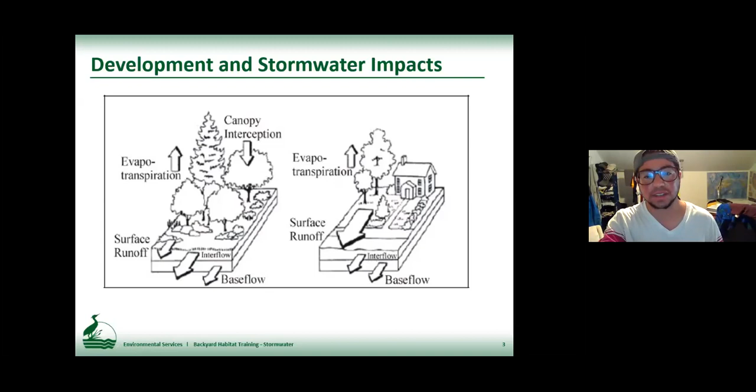Oh wait, hold on. Let me go back. So again, I work for the city of Portland. So I just wanted to talk a little bit about what the stormwater system looks like in Portland and kind of why. And then once I talk about this, you'll understand a little bit more of the effects that runoff can have. So if we're starting here in the middle of the city, we have a combined sewer system.

This means that the stormwater and the sewage is piped underground to the same pipes and then piped to the treatment plant and treated. So here in this portion of the city, the stormwater system is piped underground and mixes with sewage. Then once you get into these outer areas like North Portland and East Portland, this is where the storm and the sewer are actually separated. So they're still piped, but instead of the stormwater being piped with the sewage to the treatment plant, the stormwater is piped separately to things called sumps or dry wells, which are basically like the reverse of a regular well. So oftentimes there's these big, huge concrete cylinders below ground that have holes in them.

The water is piped to these stormwater facilities and then given the chance to soak, to infiltrate through the holes in the concrete cylinder into the surrounding medium, into the surrounding soil, and then eventually over time can then soak down and recharge the groundwater in those areas.

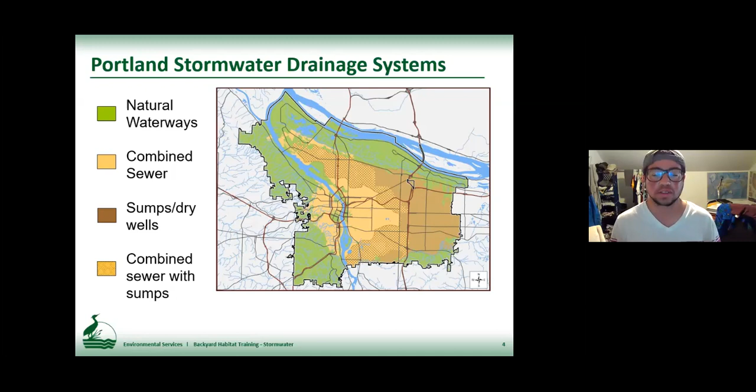So why do we have to worry about runoff? What's the big deal about runoff? It's just water. But no, it can have huge impacts. And I wanted to talk a little bit before about the types of systems so that we can think more about how the runoff can affect those systems.

So a big one is just the physical impacts of having a ton of water moving at a really quick speed. I'm sure everyone has experienced this where it doesn't seem like it's raining really even that hard, but you can see a little stream starting to develop on your street along the curb. And that's because stormwater can really accumulate and it can accumulate fast.

And when you have water running through the same pathways, it causes erosion, which can then cause pipes to be exposed, has a negative effect on habitat, and including, you can see in this picture, some sedimentation getting into the waterways, which also negatively affects habitat.

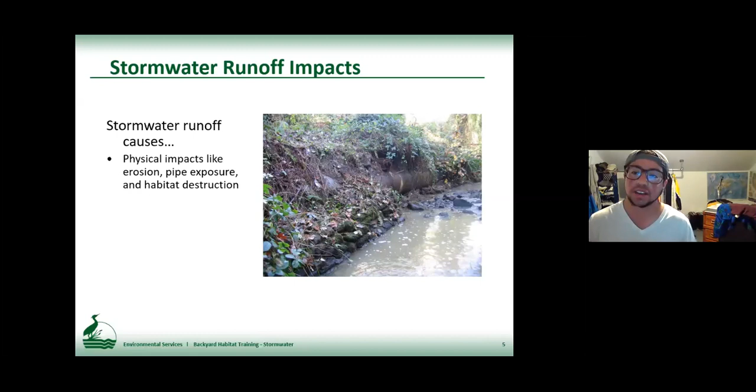Second way, I talked about those sumps, so the stormwater going to these underground parts of the city, and as stormwater makes its way down the street, it's not only picking up other water and picking up speed, but it's also picking up pollutants from cars, from all the things that we humans do. And specifically in those sumped areas, that's where those pollutants are put underground and then allowed to soak into the groundwater.

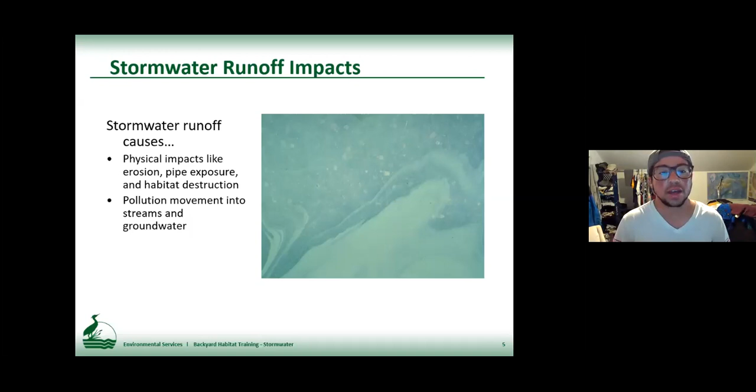Or if we're in one of those natural areas where the stormwater is handled naturally, then that pollutant just goes straight to streams. It doesn't even really have a chance to be treated by the treatment plant. And the more that runs off with our stormwater, the more debris, the more pollutants, it just puts a bigger strain on our system, even the piped system.

So again, I'm sure everyone has experienced this where you have an inlet on your street that's just chock full of leaves and debris and isn't able to actually let that stormwater down into the pipes. When that happens, those have to be maintained by folks on the ground. Someone has to come out there and physically suck all that stuff out of the inlet to even allow the stormwater to get there.

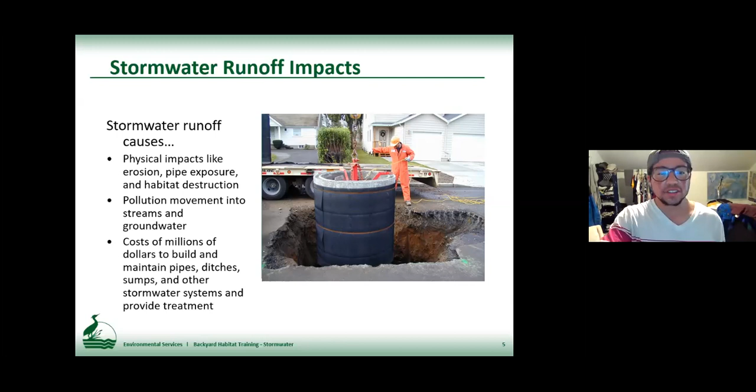So it's just a higher burden on the system itself, a higher burden on the maintenance, and even on the treatment plant, all of those pollutants going to the treatment plant, then the treatment plant has to deal with that. So let's do some retrofits instead.

Using retrofits as part of the solution mimics the natural hydrologic cycle in a manner that is safe and effective for the site and the neighboring properties. So it's doing what nature used to do before we paved it over with streets and sidewalks. So the four main components to any stormwater management project. First is collect and convey. For a roof, that would be collecting with the gutters.

If it's a paved area, collecting with curbs, and then moving it to the area of the property where it can have a chance to slow down. So that's the second part, slowing down and detaining, giving it time and space to sit in one spot. Then the third component, it has the time to infiltrate or evaporate or be used by the plants around it.

And then the fourth component, this is something that I think about a lot in my work: no matter how robust the design is for the stormwater facility, you always want to have some sort of safe overflow or escape route in case the stormwater facility, say it's a rain garden, does fill up and doesn't soak into the ground fast enough. It has a way to overflow away from the house, because you don't want it to back up into the house or other assets that can be damaged by water.

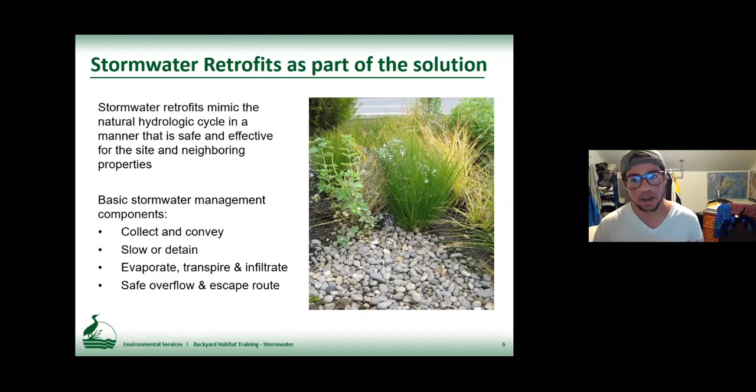Yeah, so the benefits of a stormwater retrofit: the simplest solution, it's right there. This diagram is kind of silly, but that's exactly how I think about it. The stormwater is already there, so might as well just manage it where it's at, where it falls.

Community engagement, especially in the work that I do, people retrofitting stormwater. When they learn about the stormwater system and understand their role and how they can actually help, then they get really pumped about it. They tell their neighbors, and then pretty soon the whole street has rain gardens, and people like to know that they are having a positive influence on their community.

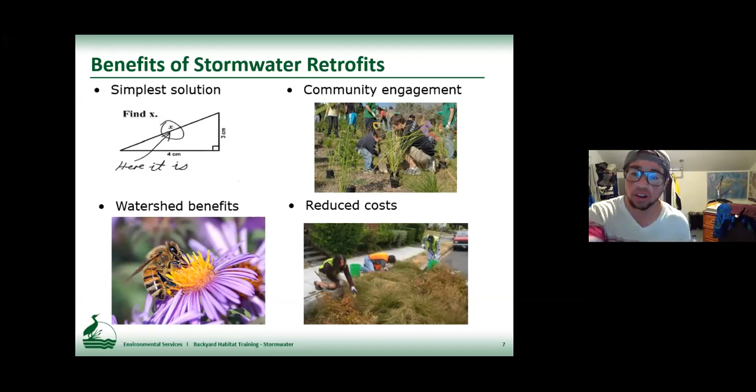And then the watershed benefits, obviously, keeping the water where it has historically been, being able to recharge the groundwater, adding native plants, and all of that great stuff that comes with adding green space to a city. And then again, reduced costs. I talked a little bit about this before, but just taking that burden off of our piped public system, less maintenance, and less cost for all of us, because we all participate through taxes.

Okay, so that was just an overview of stormwater and why it's such an important issue. Now I'm going to go into the individual stormwater menu options that participants can choose to get the stormwater credit, and I'm just going to go through all of these. Originally, I was going to say we could take questions for each one, but I think maybe we should just save all the questions for the end.

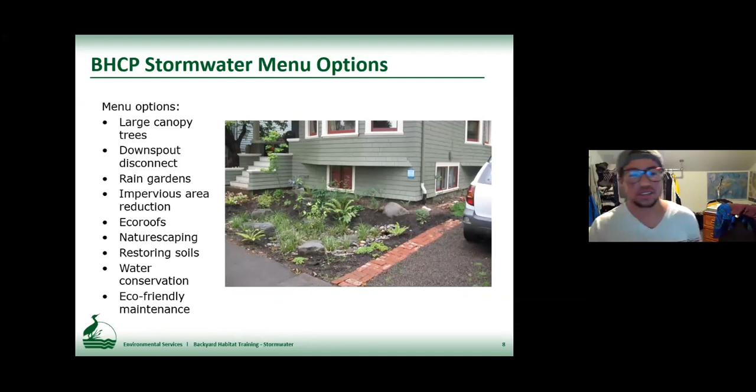So here we go. Large canopy trees. I talked a little bit about this before, having big trees. Maybe you all have experienced standing under a tree when it's raining and you can actually stay pretty dry under there. Obviously, larger evergreen trees are going to be more effective at intercepting stormwater because they have their leaves during the time of the season when we get a lot of stormwater. But even large deciduous trees, when they lose their leaves in the winter, can still have a noticeable effect. So those are still good too.

And obviously it adds habitat. I always say this, trees are the answer to everything. They really just bring so many benefits. There's a link here to a BES tree program. This is for the City of Portland specifically, where you can get a one-time credit on your stormwater bill, I believe, for planting a tree during the months of September through April. They really want to make sure that people are planting trees during the right time of the year, just not right before summer.

But again, that's for the City of Portland specifically, so it wouldn't really help those outside of Portland. But Friends of Trees is a great community resource that helps people plant trees, and they work beyond the City of Portland. And it is appropriate for all sites. Not all trees are appropriate for all sites, but all sites can accommodate some tree. You just have to be aware of overhead power utilities and the like, but I would say most appropriate for most sites.

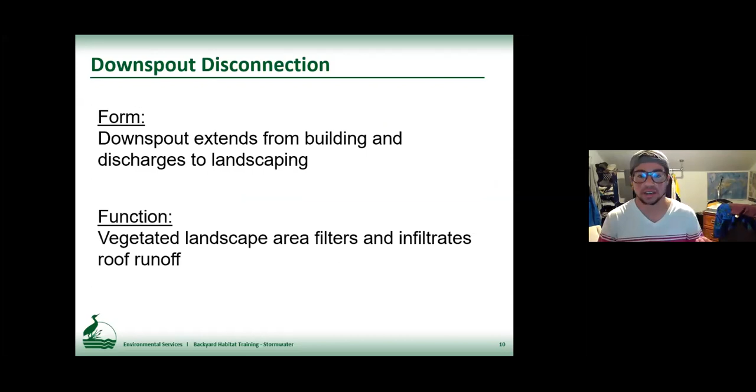Okay, next one: downspout disconnection. The way this looks is a downspout that extends from the building and discharges to a landscape. The function is allowing the stormwater to get to the vegetated area where it can infiltrate and soak into the ground. Again, I want to give you some background on the design and how to spot effective and non-effective stormwater management, and give you some tools to identify it and hopefully help the participants truly manage their stormwater on site.

So the drainage area should be at least 10% of the roof area. If you have a roof area that's 1,000 square feet, the vegetated area where the downspout is disconnected should be at least 100 square feet. And make sure that the landscape slopes away from buildings, because you don't want the stormwater to get stuck right up against the footing or the basement and cause nuisance flooding in the basement. With a slight slope away from the house, you can ensure that the water doesn't stay in that spot and cause more problems.

And can be used with other stormwater facilities. I'll bring this in when I talk about swales and rain gardens. And then, yeah, you definitely want participants to have some sort of erosion control right where the water discharges from the downspout, because you can get some erosion there and again create some type of depression where then the water stays close to the house and causes nuisance flooding. So you really want to be careful about that.

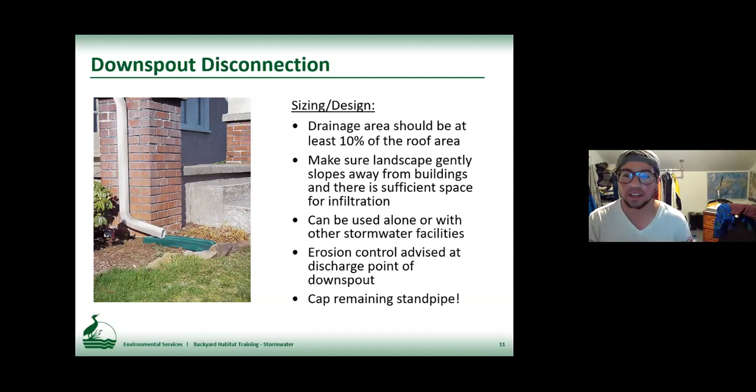And then key component, make sure the standpipes, the pipe, you can kind of see it here. I don't know if you guys can see my cursor, but the pipe, so the downspout is the material that's on the house. The standpipe is the pipe that actually takes it underground. So making sure that you cap that standpipe, because especially in combined areas of the city, that standpipe connects straight to the sewer. So that's an opportunity, if you don't cap it, for animals to come in and out of the sewer, and you don't want that. So make sure that's capped if they do have disconnected downspouts.

Okay, so the setbacks, again, these are specific for the city of Portland, but it's pretty universal across the stormwater management board. Discharge 6 feet from basements. And I personally, when I'm designing things, I like to give it a little bit extra buffer when I know that there's a finished basement, just because it's a little bit more of a risk. If water does get in there, it's going to be more of a headache. But 6 feet is the official setback requirement, and then 2 feet from any foundations or slab or crawl space. And then 5 feet from property lines. So that's neighboring property lines, and then also the property line to the sidewalk.

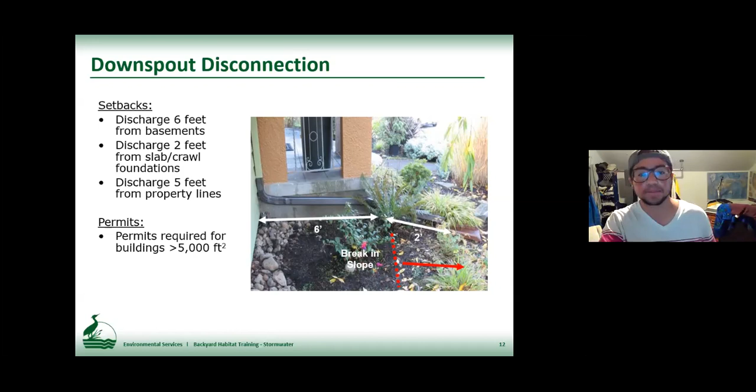And then if there's a roof area that's greater than 5,000 square feet, you actually need a permit to manage that stormwater on site. But anything less than 5,000 square feet, you could just do your project. There's no need for a permit. Again, in the city of Portland.

And then here are some examples of some good effective disconnections. So I'll just start up in the top left corner. So we have a rain chain here. Something important to think about for rain chains is that the bottom is secure. And so here in this specific example, the bottom of the chain is connected to the pot. The water is allowed to fill up the pot and then it overflows beyond the pot. So just making sure that, again, where it overflows is at least 2 feet from the slab, 6 feet from a basement, the same setbacks. Here, the next one over, we have a rock to control for erosion.

Down below, this is one of my old boss's houses, actually. This is just to show you that you can get pretty creative with these things, and really add to the overall experience of the space, and not just stormwater. You can get something pretty cool in there. And then this is just your standard disconnection with the foot there to limit the erosion.

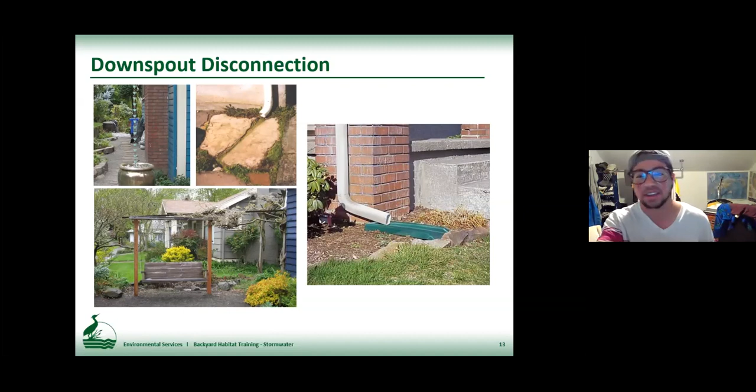And then here are some disconnections you want to be on the lookout for. I know the whole point of this program is to really encourage people to do this kind of work and create habitat. But some of these examples, they're just not long-term solutions. So being able to point them out and maybe guide people in the right direction. So the first thing is where it's disconnected, it should be a pervious surface, not impervious. So here it's disconnected to a brick path, which is impervious. So that's not gonna do a whole lot for managing the stormwater, and especially during the winter when we can get into those freezing temperatures, this is a hazard for sure.

Over here, this top one, it's going to a vegetated area, so that's good, and it's definitely meeting the setback requirements, but the way that it's constructed is just not a long-term solution. Someone can trip over it and knock it down, and then it's no longer effective, or people would just get irritated with having to step around it and take it apart. So you really want to have something that is a long-term solution to stormwater.

The next one down, it's kind of hard to see, but this is disconnected straight to the sidewalk. So that's not really accomplishing managing your stormwater at all. It's just moving it to the sidewalk, where then it runs down the sidewalk and gets to our public sewer, and is essentially the same thing as just having your stormwater piped to the sewer underground.

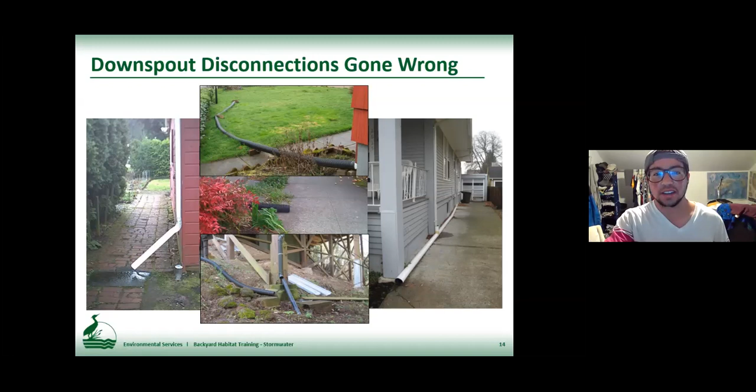And then this one over here, again, we want the disconnection to be to a vegetated area. Here, it's going mostly to the driveway, which then just flows down the driveway into the street and then back into our sewer system, and not staying on site at all. Okay, moving on to the next one. That was downspout disconnections. Okay, so this is what I was talking about, the slope and stuff.

All right, next one, rain gardens. The way this takes form is a shallow vegetated landscape depression with a flat bottom and gently sloping sides. And the function of this, again, is to give the water time to accumulate and then slowly soak into the ground. So this can be an option for a site where maybe a downspout disconnect isn't an option because the slope is too steep, and you can get a sort of tiered rain garden in there, with flat bottoms for each section. Make sure it's planted with native water and drought tolerant species, because they're going to get a ton of water in the winter and not any water in the summer.

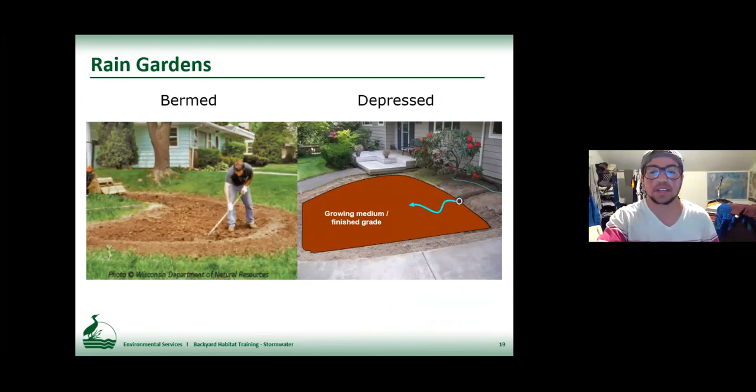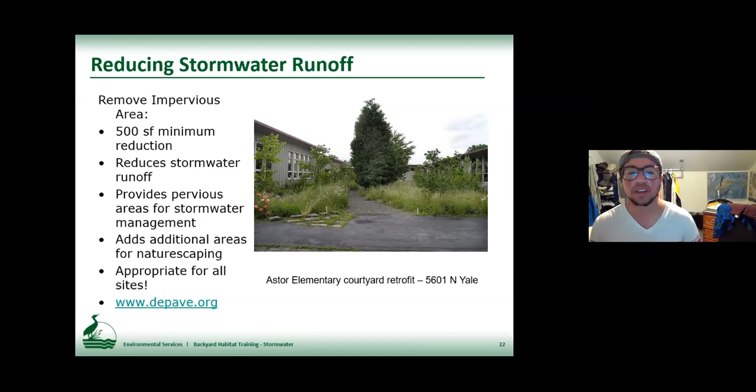And then I have a link here for an organization, Depave, that works with private property owners to depave their site and release the soil. That could be a good resource for people.

And with the pervious concrete and asphalt, they both actually do have some maintenance requirements. I've heard people say that you're supposed to vacuum them to take out the dirt and stuff that's clogging them up. So vacuuming, or just clearing out the debris from time to time, making sure that there's not a ton of debris so that when the water hits the concrete or the asphalt, it actually can soak into the ground.

And that's the same with the pavers too. All of these things, if they're covered by leaves, the water is not going to be able to get in contact with them and then soak into the ground.

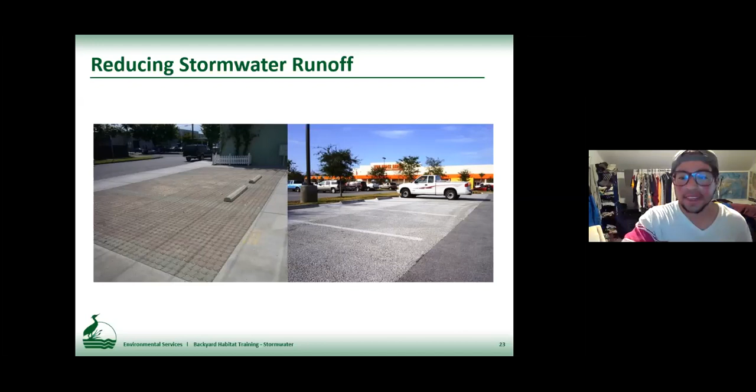All right, so I guess this is kind of similar to removing impervious area, so removing grass and sod. Grass and sod can, in a lot of cases, act like an impervious surface, especially if it has just a little bit of a slope. Grass is just horrible for soaking up water. I mean, it'll do it, but it's really not great. The grass has really thick, shallow roots, so it's just hard for the water to get in there.

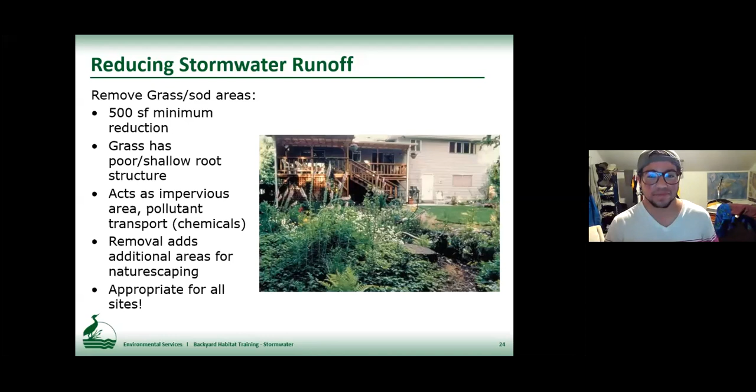So yeah, removing at least 500 square feet of grass. Again, it's the same with removing impervious area. It just gives more opportunity to do something else with that ground, additional naturescaping, and maybe plant a tree, something like that. Again, appropriate for all sites. Any site that has grass, get rid of that. Yeah, so here's some examples. This was a lawn, and then they removed the sod and were able to put all these other plants that just have a ton more benefit than grass.

I feel like I have a passion against lawns. I feel very passionately about getting rid of lawns. Unless you really use them, like if you're gonna play soccer or something on that. But I just feel like most people don't actually use their lawns, so yeah, get rid of that stuff.

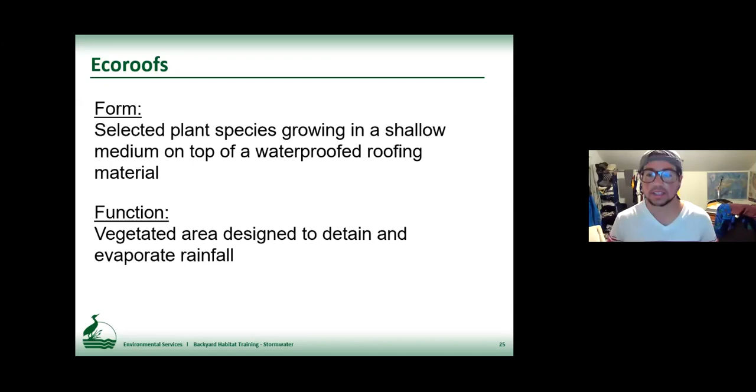Okay, next, Ecoroof. This is probably one that you're not gonna see very often, but it's a menu item, so I'll go through it. The form that it takes is specific and selected plant species growing in a shallow medium on top of a waterproof roofing material. And the function, again, is to increase the vegetated area to allow water to soak in. And specifically with Ecoroof, it's more like a time delay. Ecoroofs are more for slowing the water down; there is some evaporation, but it's more for slowing the water down during those really peak storm events where there's just a ton of stormwater in the system. Even slowing it down just a little bit, even if it eventually does make it to the system, shaving off that peak of stormwater that's getting into our system is hugely beneficial.

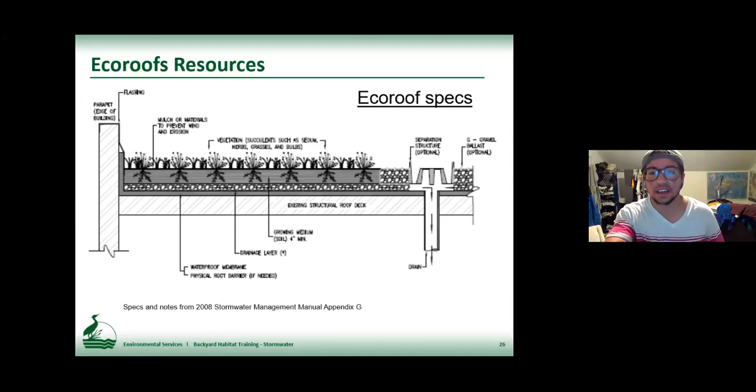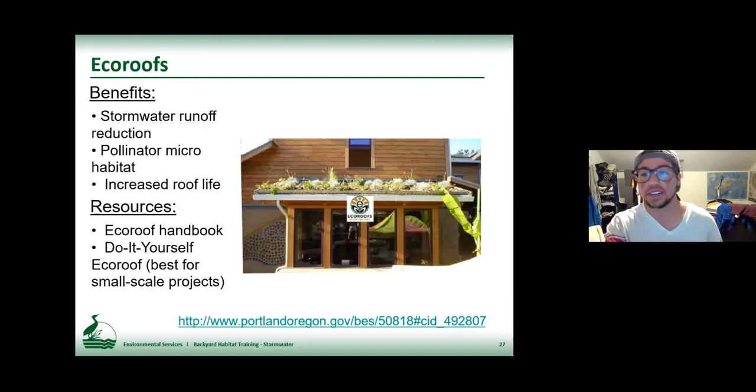Okay, so the next item is increasing naturescaping. So if they increase their natives 10% beyond the naturescaping requirement, that can be counted for the stormwater portion. It can increase the interception by having those multiple canopy layers and reducing the amount of water that actually finds its way to the ground. And the roots are just a lot stronger. They're good for erosion control and infiltration. They actually get down into the soil, so the water that does find its way to the ground can follow those roots further down, not like grass with really short roots, where the water isn't really going very far. So again, appropriate for all sites, especially when coupled with removing sod and other impervious area.

Okay, restoring the soils. So leaving debris on site, so leaves, pine needles, all of that debris from the site, leaving it on site, adding more compost to the site, and just allowing the water to hit the ground and have some space to stay on site and slow down, and then soak into the ground and increase this subsurface interflow layer. And I just wanted to say on this one, the homeowner doesn't have to have leaves just strewn about the whole lawn.

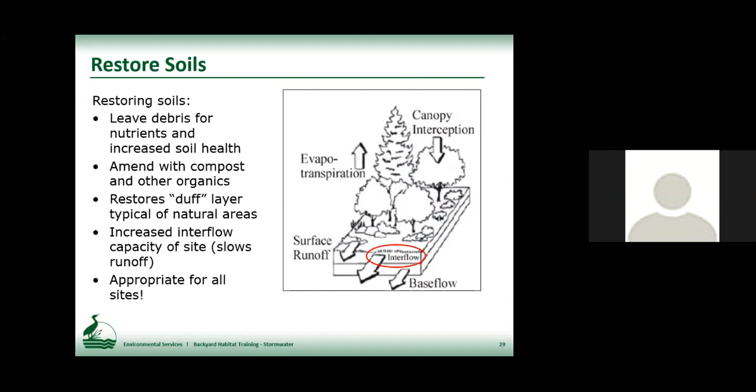I think maybe Megan can speak to this if this isn't right, but as long as they can do it in a portion of the yard and still get some credit for that. And again, yes, SK, just to confirm, they don't just have to leave the leaves entirely, they could congregate them. Yeah. So again, appropriate for all sites.

Just leave your leaves on site and let it decompose and turn into compost, and add more pore space and organic matter, and then the soils will then have higher holding capacity for water. Because a lot of soils in cities just generally are very compacted. And so adding more organic material will kind of give it that forest, soft, spongy feel over time, over a lot of time.

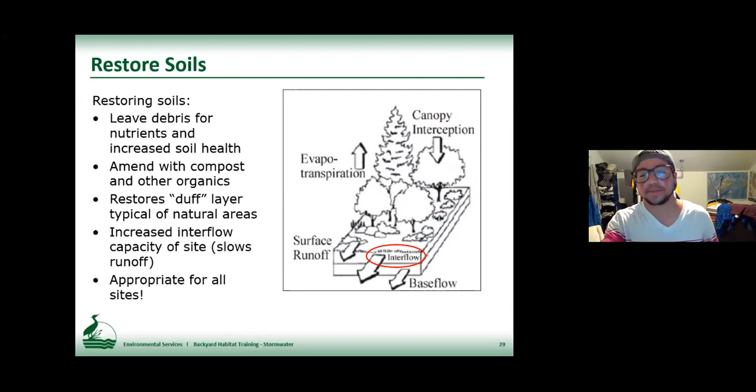Okay, and then another menu item here, water conservation. So this is something that you might not see when you go out to the site. So from memory, it's kind of a conversation that you have to have with the homeowner, talk to them about their watering practices, and if they are watering less or spot watering, or not watering at all, they can get credit towards stormwater. And again, appropriate for all sites.

Okay, this is not a menu item, but I just like to put it in here just to get people thinking of it. And if they do see these types of systems, just know that it's not officially a stormwater management menu item. And that's specifically because it's not really keeping the water on site and recharging the groundwater and adding all those natural benefits. All rain barrel or cistern systems have to have some type of overflow. And if you've ever had a rain barrel, you know how quickly those things can fill up.

So if you do come across it, well, I guess you're not really doing anything about it, but if you see that it's a small system and there's not a nice way that makes sense for the water to overflow, maybe mention that to the homeowner. Especially often they're right next to the house, so when they do overflow, that can often lead to nuisance flooding because it's overflowing right next to the house. So it's not a menu item. People cannot get credit for it, but it could be a good opportunity to just talk about stormwater in general with the homeowners. All right.

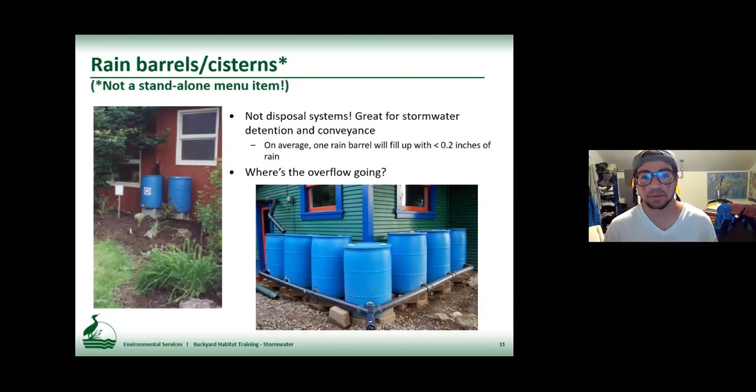Next one, eco-friendly maintenance practices. So hand pulling, eliminating power tools, utilizing eco-biz landscape contractors. So again, this is something that you probably wouldn't notice right off the bat from just visiting a site. It's probably something you'll figure out from talking with the homeowner about their maintenance practices. And again, appropriate for all sites.

Okay, flow through planters. This is not a menu item, but I did want to talk about it because there's two types of planters. There's the flow through planters that actually work very similarly to the eco roofs, where they have a drain that then goes back into the system. And then there's infiltration planters. An infiltration planter is basically the same thing as a rain garden. It just is more contained. It usually looks like a planter, so it has those concrete borders, but it has an opening on the bottom where the water can infiltrate.

And so those are basically the same as rain gardens, but a flow through planter is actually not holding the water on site very much at all. So if you see those, definitely they do not get stormwater credit for that. And the easy way to know the difference between a flow through planter and an infiltration planter is a flow through planter will have a drain, like a little cap. I'm sure we've all seen them, like a little beehive cap where the water can go into, and then it'll go to the sewer system.

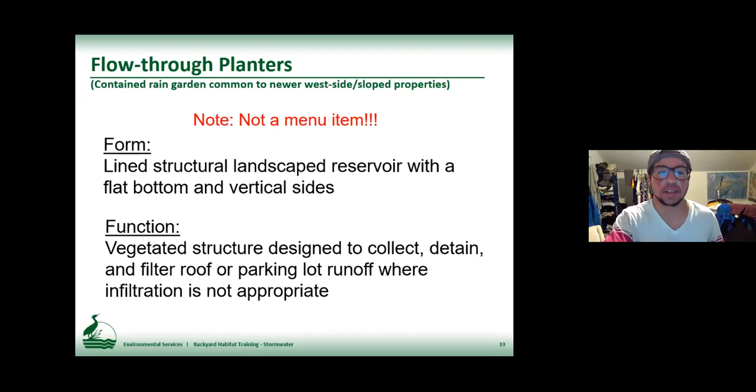The main difference between a flow-through planter and an eco roof, and why I think the eco roof is a menu item, is because it's covering the whole impervious area where the eco roof is. In a flow-through planter, it's actually getting a ton of water draining from the rest of the whole building. So it's just a ton of water, and it just can't hold that much water. So it's almost instantly going to fill up and then go into the system.

Whereas an eco roof is only managing the roof, the area that it's on. So the turnaround time from the water soaking to the drain layer and then getting to the system is very, very slow, just because there's less water on that system.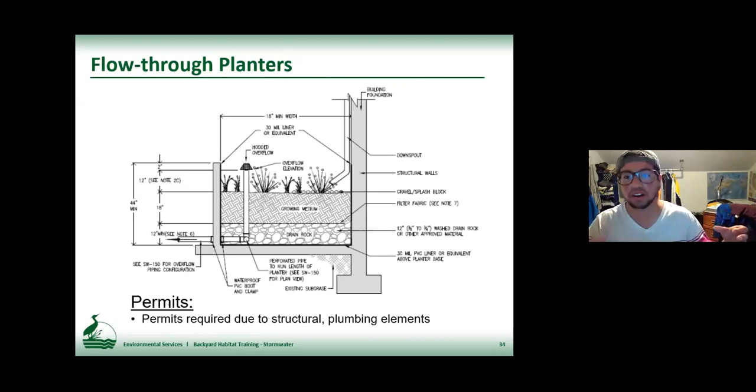And yeah, just be aware of those, they might come up, and oftentimes homeowners don't really know what kind of stormwater system they have on site. So if someone does mention, oh, I have a stormwater planter, I should get some stormwater credit, maybe you can do some community outreach and explain a little bit about why that's not really managing the stormwater on site.

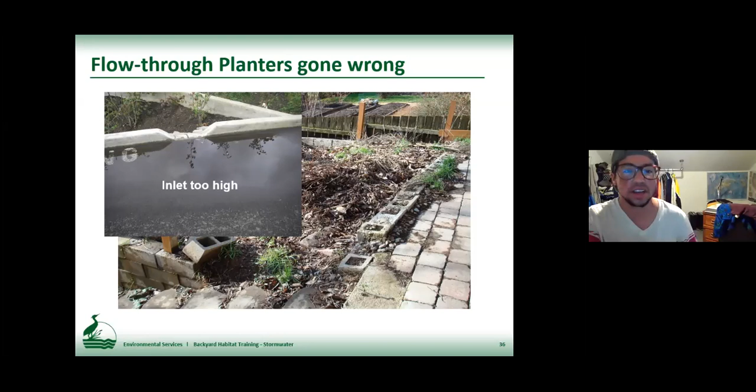And here the inlet is too high, so the water can't even actually get into the planter. And then here the overflow is too high, so it's not doing its job. It's keeping the water on site because it's not getting into the overflow system and then into the sewer system. But there's a reason why a flow-through planter was built and not an infiltration planter.

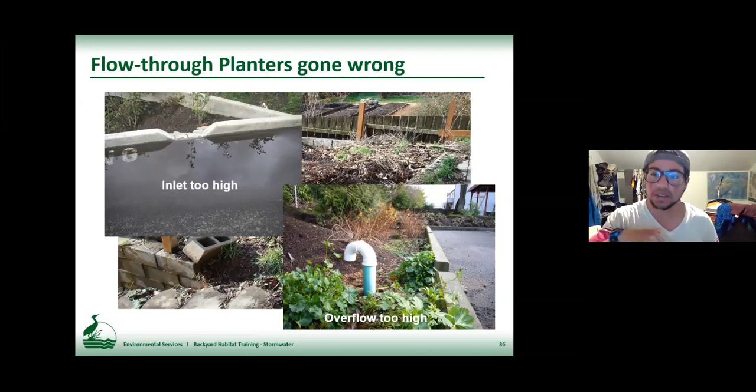So with a high overflow like this, the water is probably going back out the way it came and creating a flooding situation in this area. Because it's at the downslope, say it's a parking lot, it's at the bottom of the sloped parking lot, and isn't able to go into the system, so it's just staying there and not going anywhere.